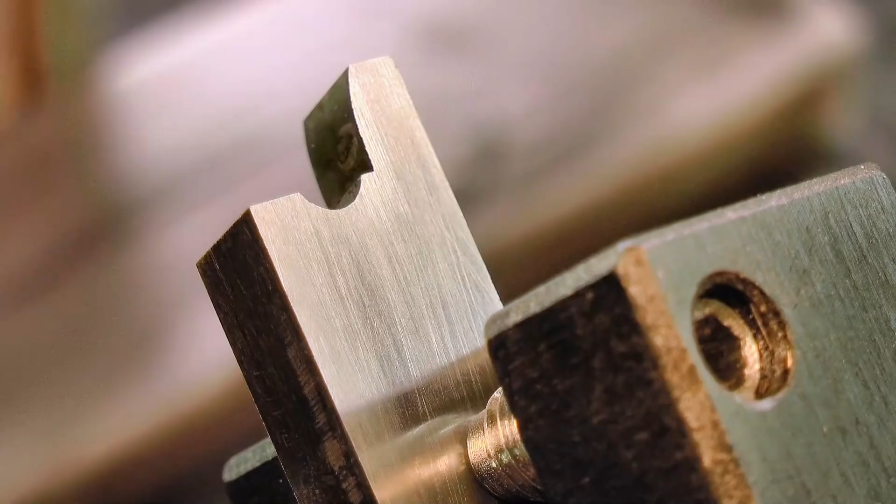But before I can form the knurl pattern, I need to shape the brass perimeter so that the knurling tool will work correctly, and I'm going to do it using a form tool like this.

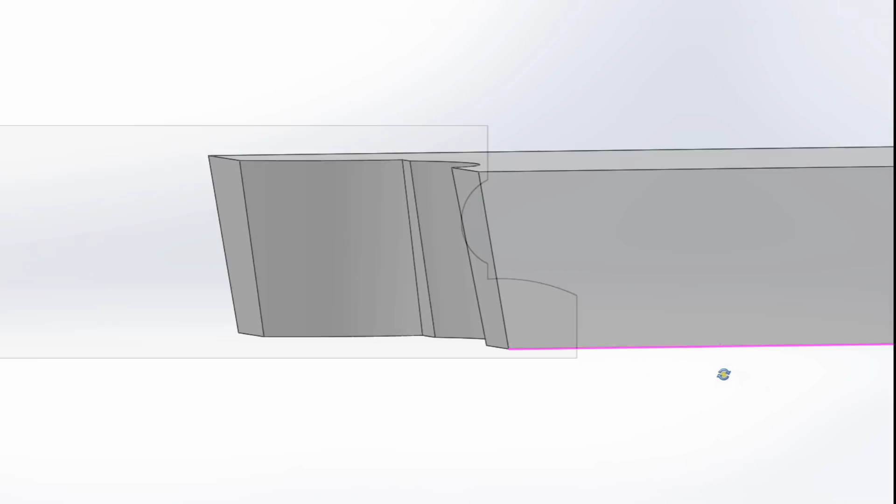The profile of the cutter is reasonably straightforward, but the relief angles require a bit of planning. I've chosen 10 degrees as the relief angle, and I should be able to take care of these front faces on the mill. Ideally I'd cut the central section with a tapered end mill, but I don't have one, so instead I'll drill it out and then finish it off by hand using a file.

So starting with some 1/4 inch O1 tool steel, I cut off a section and then squared it up on the mill.

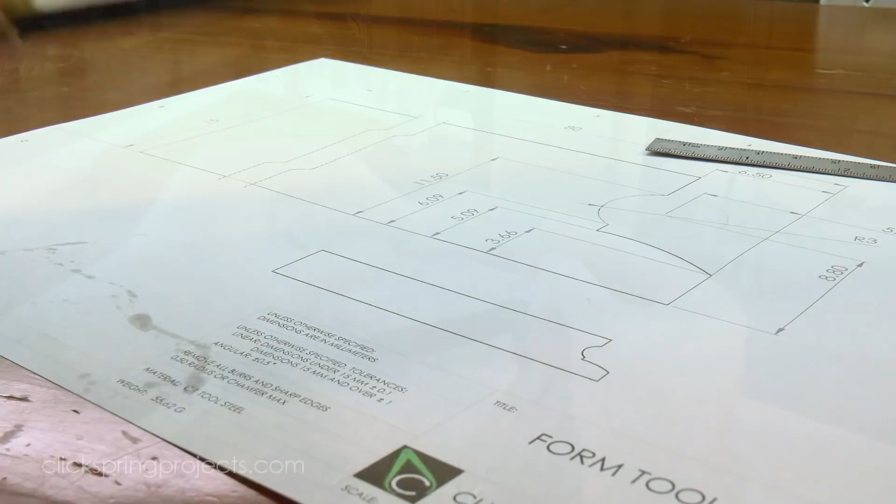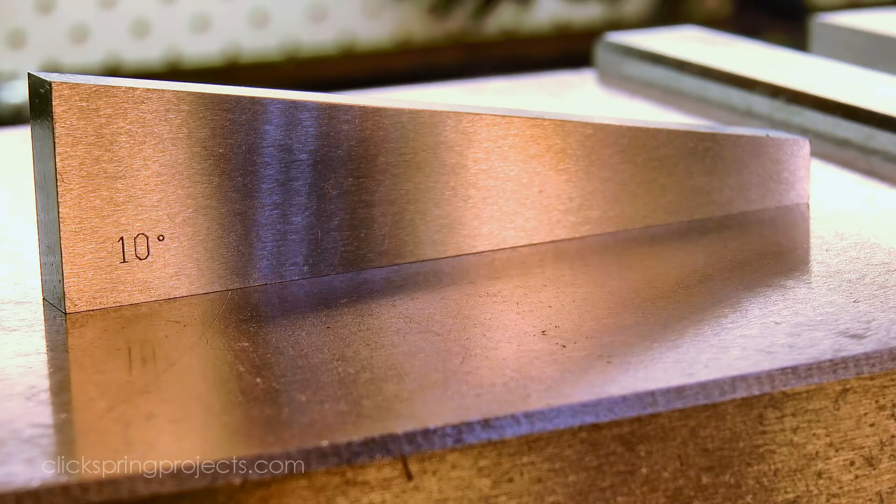Using this angle block, I set the work on a 10-degree angle in the vise and then mill the datum face.

I'm going to use the digital readout on the mill and this sharpened carbide rod to mark out some key points and lines.

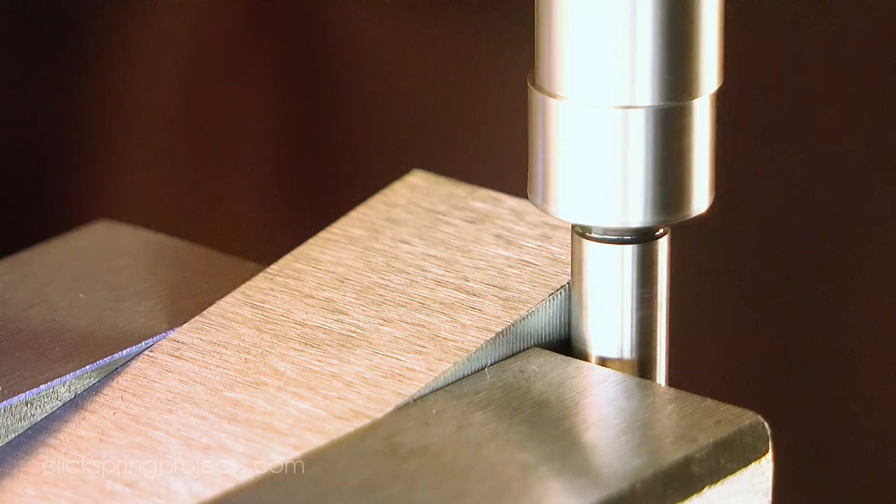I milled a small flat for the drill point and then drilled out the central section of the cutter profile.

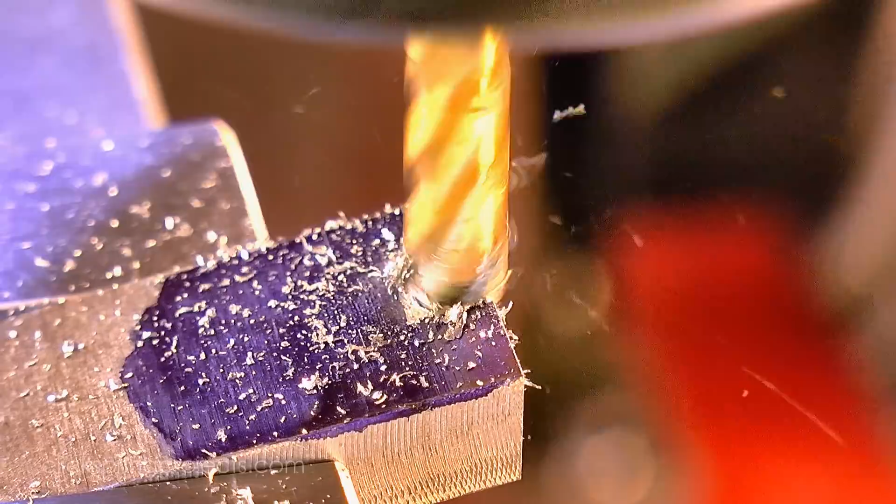Okay, so next I need to mill the work down to this reference line as well as across to this corner, while at the same time generating the relief angles.

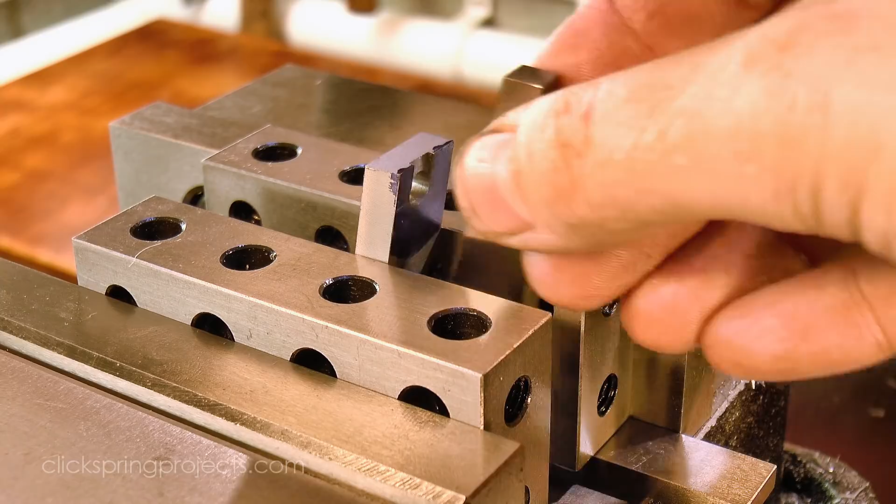Now I can take care of the main relief angle in a similar way as before, by using the angle block to tilt the work in the vise. And the second angle can be generated by using the swivel base of the vise.

It's not super accurate, but the relief angles don't need to be overly precise anyway, so it's close enough for what I'm doing here today.

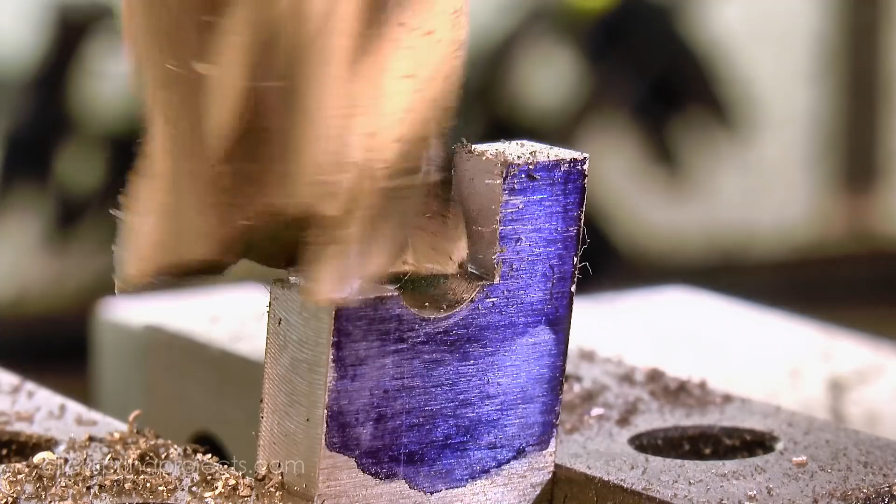This section here needs to be profiled into a curve, while at the same time generating the 10-degree relief. I think the easiest way to tackle this is to use the belt sander.

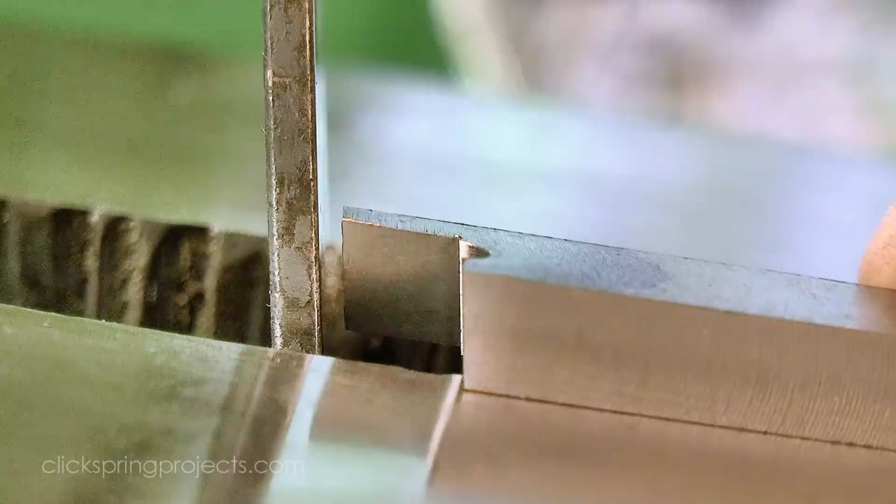So I've tilted the table to 10 degrees to match the other face angles, and then using a 400 grit belt, I've formed the curve.

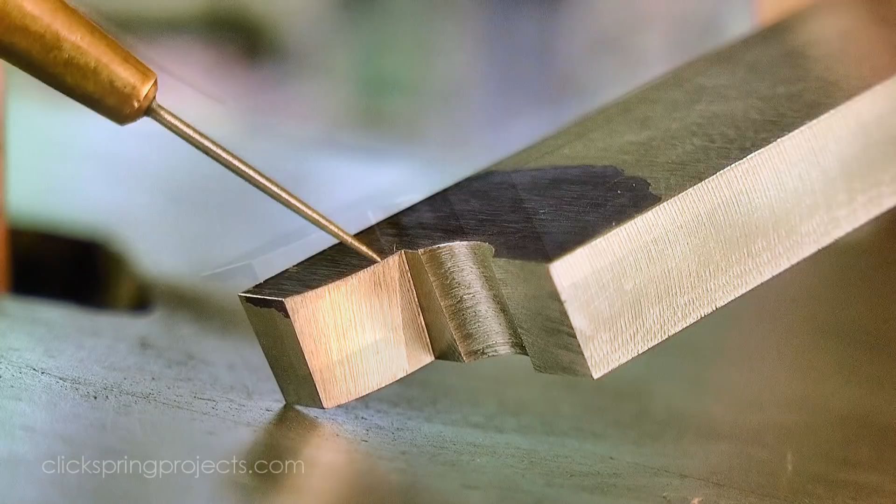The curved section terminates at the point I marked out with the DRO, and I've sanded as far into the corner as I dared without risking the profile.

All it needs now is for the curve in the centre to be flared out towards the base, sort of similar to this corner here.

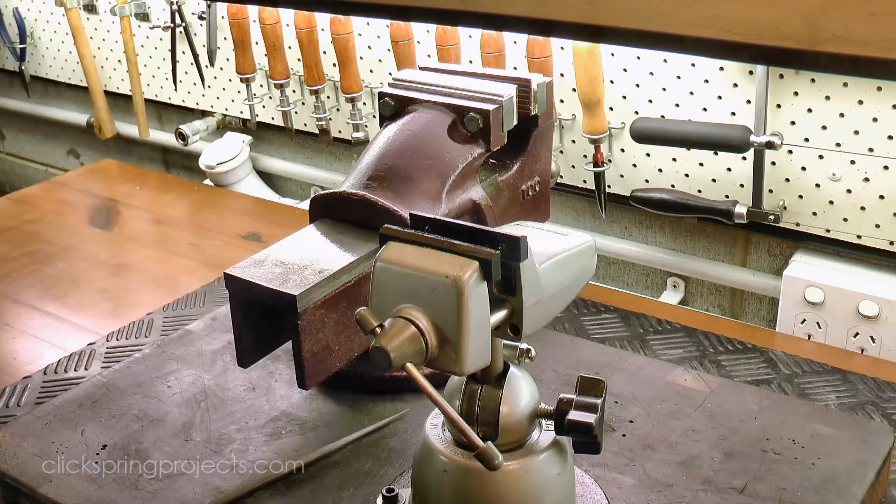I'm using this fine cut file to do the shaping, and again I'm being as careful as I can to avoid altering that top profile.

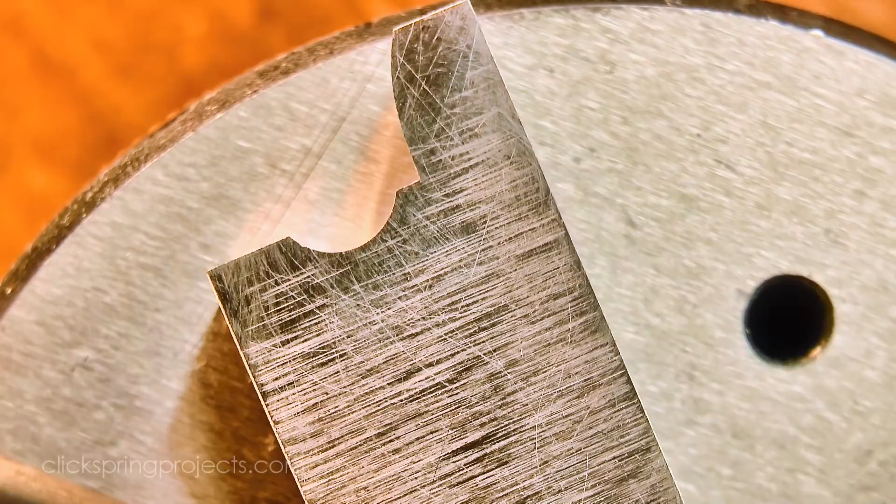A quick rub on an oil stone takes care of the small burrs, and that's the bulk of the hard work done. The top profile has come through the process mostly unscathed, and all of the cutting edges now have the required relief.

The last step is to quench harden the steel and temper the cutting edge to a light straw.

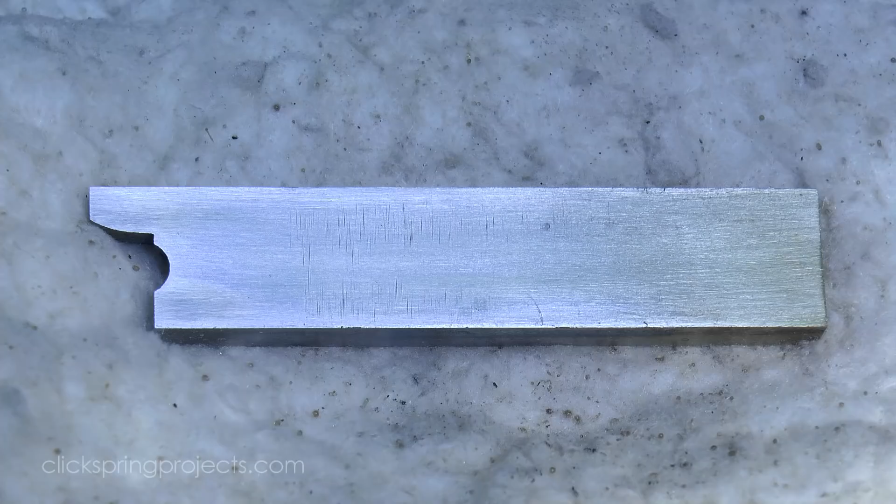A quick hone on this oil stone and it's ready to be put to work.

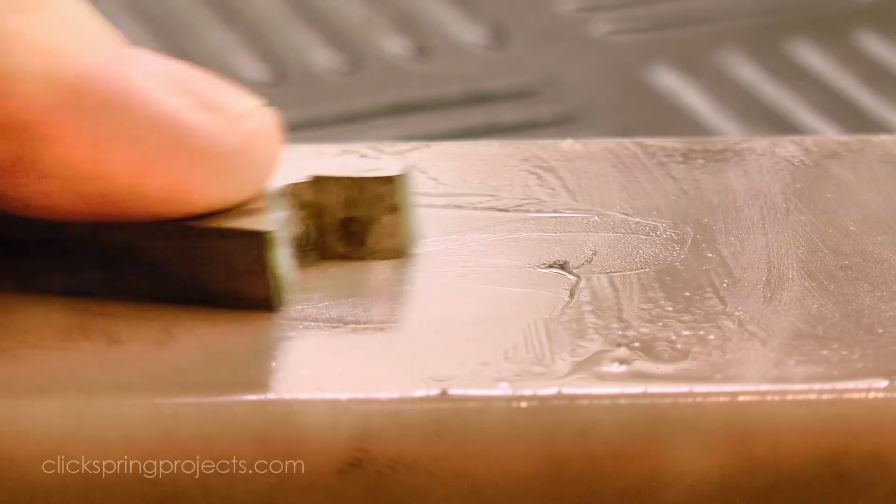A form tool like this is a great way to get a repeatable profile onto a short run of parts. There's a few drawbacks in using them though that are worth mentioning.

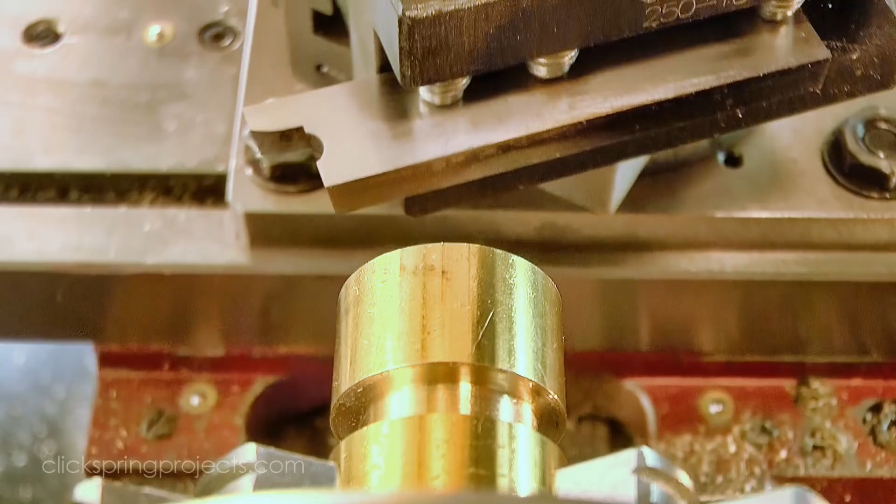Firstly, there's a lot of cutter surface in contact with the work, particularly when it gets to full depth, so it's really quite hard work for a small lathe like this. This cutter is about 15mm wide, and I'd say it's at the upper limit of what my lathe can cope with before it simply stalls.

Secondly, chatter on a tool like this is pretty much unavoidable, but I've found that using a low RPM and keeping everything as rigid as possible makes it quite manageable.